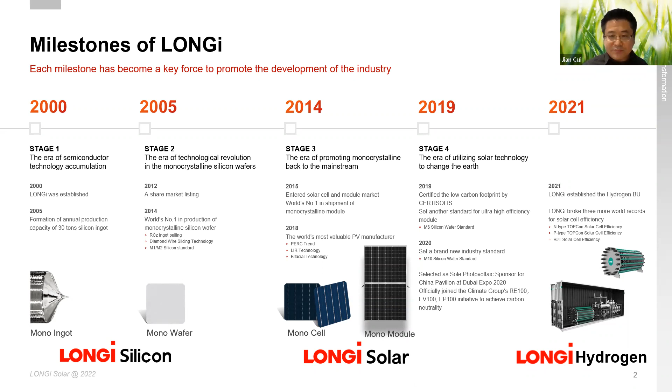Here it shows that our mono wafer manufacturing is world #1, with the industry leading standard wafer size. We achieve 100% diamond wire cutting of mono silicon wafer, and our shipment is also #1. All our factories, including ingot and wafer, shipped more than 70 gigawatts in 2021. That means all the other module manufacturers and cell manufacturers, including our competitors, buy wafer from us too.

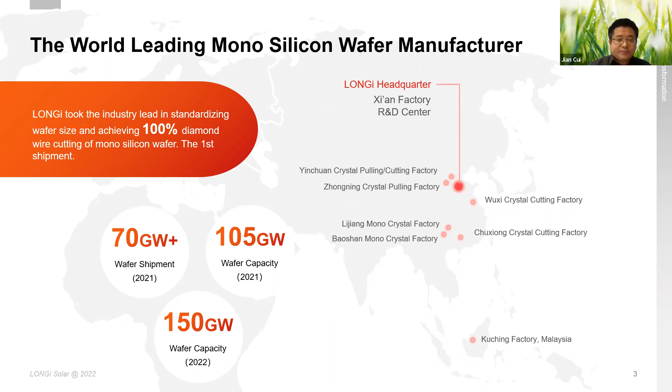This year, our wafer capacity increased from 105 gigawatts to 150 gigawatts. In 2021, we were the #1 solar technology company, shipping more than 38 gigawatts. In fact, we are always #1 for shipping mono products, but from last year we are #1 including all kinds of modules, including poly and mono. The module capacity increased from 60 gigawatts to 85 gigawatts this year.

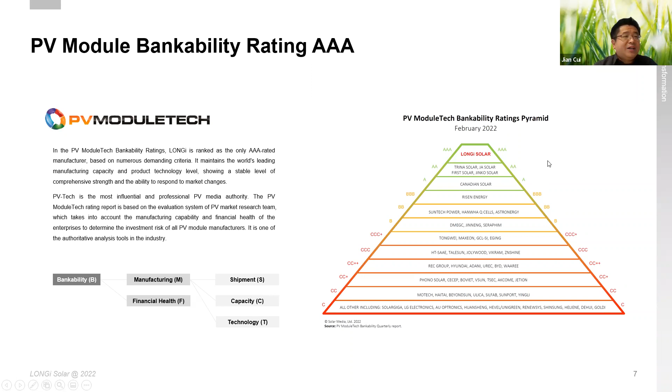As a result, by December 2021, we have accumulated 1,387 patents. We also cooperate with research institutes and industry partners to ensure our products provide the optimal solution to customers while lowering our cost.

That's why, because of this strong technology strength, it also helps us achieve strong financial performance.

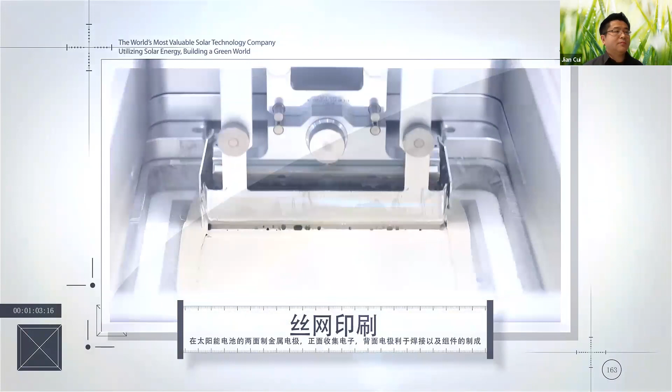Okay, the last is the PV module.

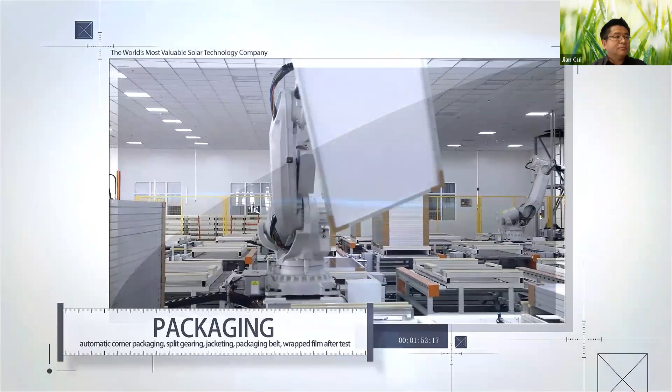As you can see, the factory is highly automated. As mentioned, LONGi diligently works with industry partners, including equipment and material suppliers, to optimize the process and increase productivity. Here it shows we're starting with the ingot production, which you saw in the first video.

From this RCZ ingot pulling technology, applied since 2013, as you can see, at the beginning it was 60 kilograms per crucible. This is one crucible.

Then with our continuous technology improvement, we continuously increased the feeding rate, and we can also do multiple pulling from one crucible. So up until today, we can do more than 1.5 tons per crucible.

The high-speed ingot pulling technology increased the speed by 80% since 2013. The production line kept advancing automation, including automatic control system, automatic loading technology, automatic edge cleaning system, etc.

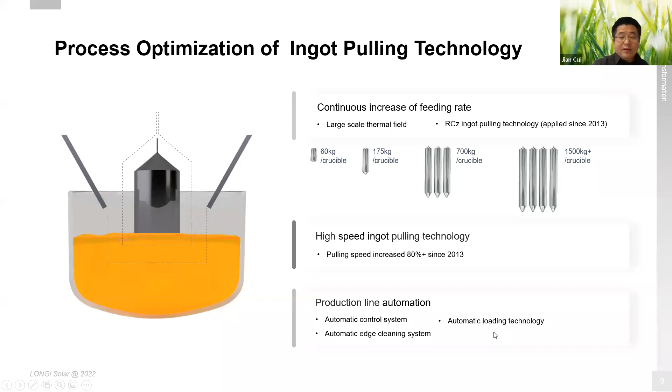The revolutionary diamond wire slicing technology was first introduced by LONGi in 2014 and achieved 100% diamond slicing in 2015. We also continuously reduced the diamond wire diameter so that one ingot can produce more wafers, and the slicing speed increased by 90%. So productivity significantly increased.

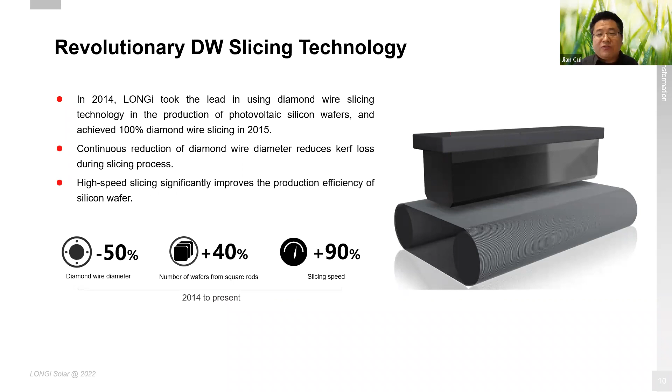This concept gives a direct idea of how it can save for the industry. Each year, due to this technology, it saved the PV industry over $4 billion. That's per year, relatively equal to the construction of 5 Beijing Olympic stadiums each year.

So that's why, because of the technology innovation, especially from the ingot and wafer part, it significantly reduced the cost by 80% between 2018 and 2019, and also the quality of the wafer significantly increased, because the quality of the wafer will strongly affect the quality of the cell, and ultimately the power performance of the module.

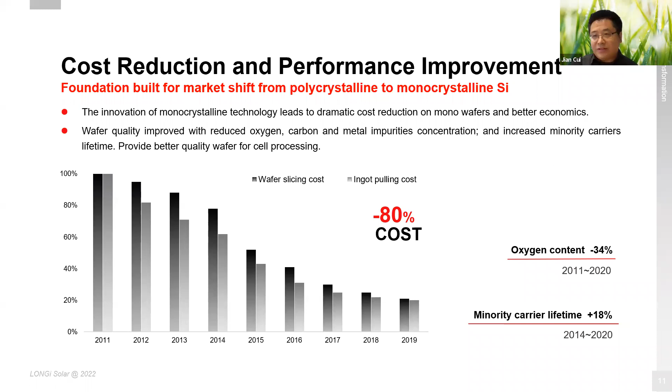Not only on the mono ingot and wafer, but LONGi has been leading technology innovation on cells and modules through the years, as you can see here.

We just introduced the ingot and wafer technology, and we also have PERC, mono PERC, from mono PERC to bifacial PERC, and half-cut to large size wafers like M6, M10 standardization. LONGi is leading the way in introducing major advanced technologies into the market.

We are one of the first companies on PERC since 2016, and our related product is Hi-MO 1. We also first introduced bifacial PERC to the market in 2017.

More customers realize the value of bifacial PERC technology and choose it, especially for their utility projects, significantly because bifacial PERC provides a higher energy yield to help customers realize their value. We call it lowering the LCOE.

So our product related to this first launch is Hi-MO 2 for the bifacial modules. With half-cut technology, the module performance is even dramatically improved, especially when there's shading.

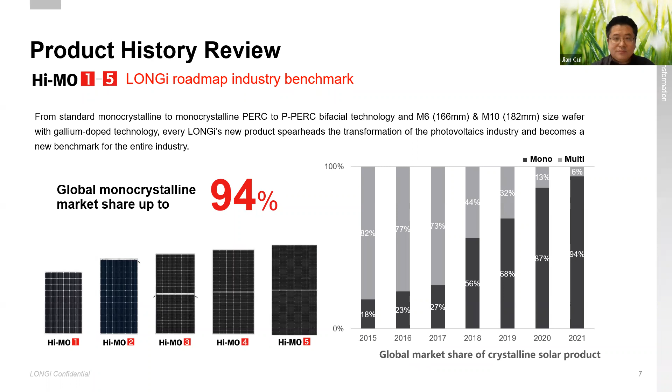Before continuing to the quality issue, I would like to briefly mention the bifacial module. What is a bifacial module, and what's its short history?

It's interesting that we saw this in the history of utility projects, and we see this happening also for DG, for everywhere. So what is bifacial? A bifacial module is glass, POE, and the cell area, then POE and glass again.

They laminate together. POE is like a glue that sticks the module together very stickily. We call it bifacial, meaning the cell has two sides that can absorb light and generate electricity.

The backside, instead of a back sheet, is glass, allowing light to reach the cells from the backside of the module. So there's a concept called bifaciality, and we use POE because it's highly reliable.

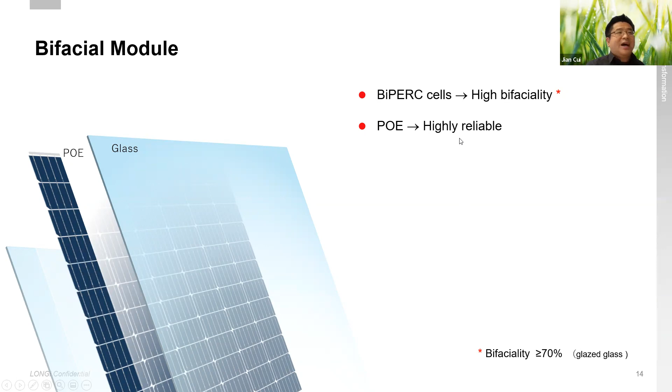The market adoption of bifacial was not an easy achievement, like many other new technologies. Customers, especially investors, did not accept bifacial right away when we introduced this bifacial module in 2017.

We had to work with various partners, including third-party test labs, downstream partners, and suppliers like trackers and inverter companies, to study how system design impacts the bifacial backside gain and how to optimize the design to maximize the backside gain. Through those exercises, we were able to optimize the module design, and partners were able to optimize the BOS coupled design and system parameters.

We are very professional on this through years of experience, and finally able to optimize the bifacial gain, which is the backside extra energy yield, so that we could establish confidence among customers and investors to finally adopt the bifacial technology, especially financing the backside energy yield. Nowadays, more than 50% of our shipment is bifacial modules.

This is widely welcomed by customers. The map here shows that, of course, before you have a project you can do PV system simulation, but more concrete evidence comes from bifacial tests through real pilot projects.

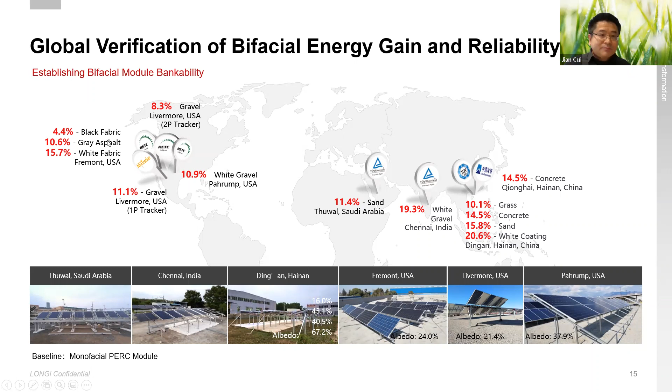Here it shows not only the pilot project but also a lot of real projects we've implemented. This big project with PV bifacial module outdoor testing was one of the tests done by the PVEL laboratory, as you can see here.

In Davis, California, they studied reliability and power generation of bifacial modules from different manufacturers, and found that products from different manufacturers are significantly different. In fact, this shows that our module has the best performance for the bifacial energy gain.

Here just grass reflectivity means the ground situation is grass, and white reflectivity means the ground is white. Usually when the ground is white, there is more reflection, so the bifacial gain is higher.

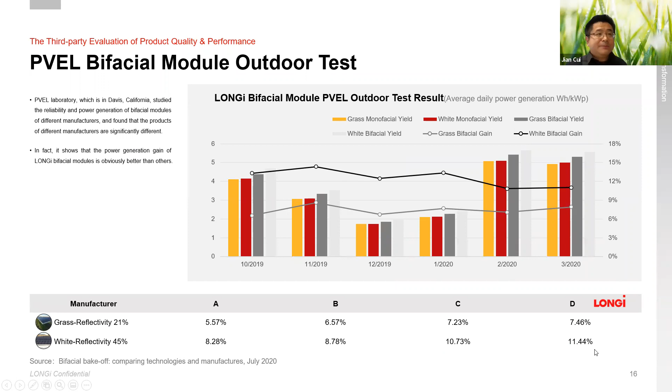LONGi started mass production of PERC cells and modules back in 2016, and we led the industry-wide adoption of mono PERC.

Our PERC world record efficiency is 24.06%. The quality, performance, and reliability of our mono PERC modules are also proved by famous third-party organizations like TÜV Rheinland, PVEL, and RETC, and also the power generation test by PV Magazine. Our modules are always in the top 5, and especially one is always ranked first.

Besides the PERC technology world record, since 2021 we've kept breaking world records on TOPCon, N-type TOPCon, P-type TOPCon, indium-free heterojunction, normal heterojunction solar efficiency, and P-type heterojunction. Just a few days ago we also set a new world record on heterojunction solar cell efficiency, which is 26.50%. The highest cell efficiency of other technologies mentioned today is 26.60%.

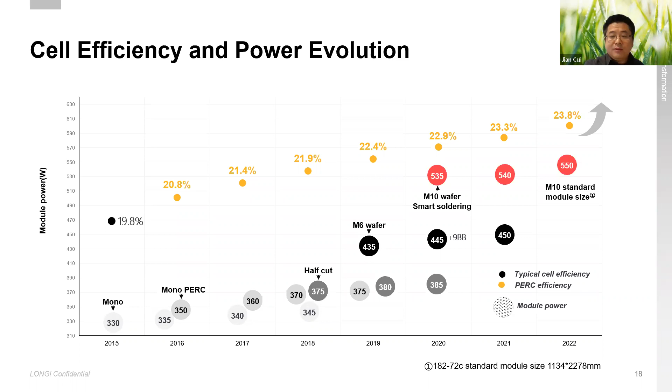That doesn't mean we don't consider other cell technologies. As you can see, we already have efficiency world records on other technologies. We continue to develop and evaluate advanced technologies like passivated contact - you can understand this as heterojunction, TOPCon and heterojunction, back contact, and tandem. For sure, cell efficiency will increase with those technologies, but you should consider the challenges, such as cost, and especially mass production and high volume manufacturing feasibility.

So as LONGi, our conclusion is that right now PERC is still the main technology, and we still need to dig deeper for its potential - it will remain the main technology for the next 2 or 3 years. But as I mentioned, we will introduce the right technology at the right time. We have all the cell technologies ready in our yard, so we will introduce the right technology into production and into the market at the right time.

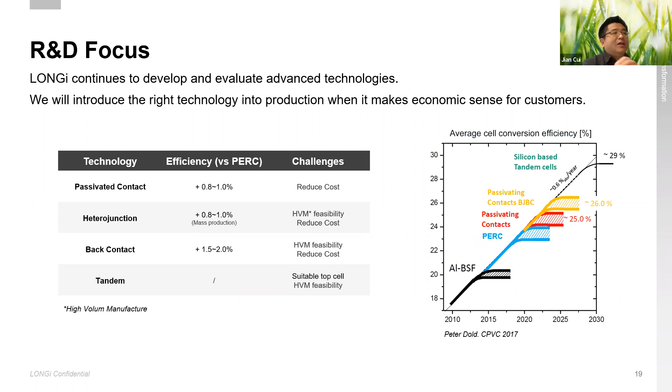Back 5 or 6 years before, when the module industry was starting to boom, at the beginning it was always government support, like a feed-in tariff. At that time, the most emphasis was on module design, and relatively less emphasis on verification. But nowadays it's always about bankability — you need to get money from the bank to support your projects. So more and more, module reliability tests, manufacturing quality control, and field performance become more and more important.

We have all this quality control, certified by our quality management. So we launched LONGi's lifecycle quality, which means we guarantee our product quality and performance from start to finish — from module design and verification of all the reliability, to quality control and performance. I will explain in more detail in the next slides.

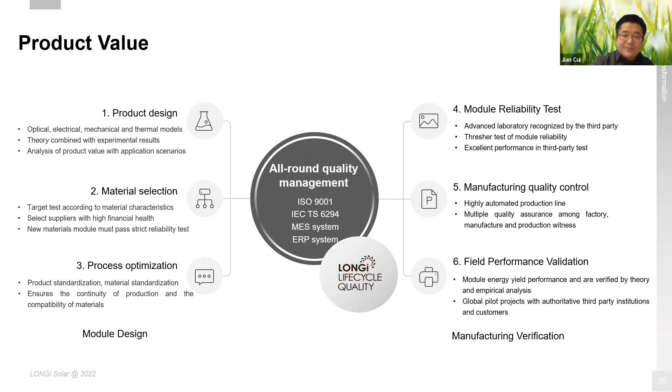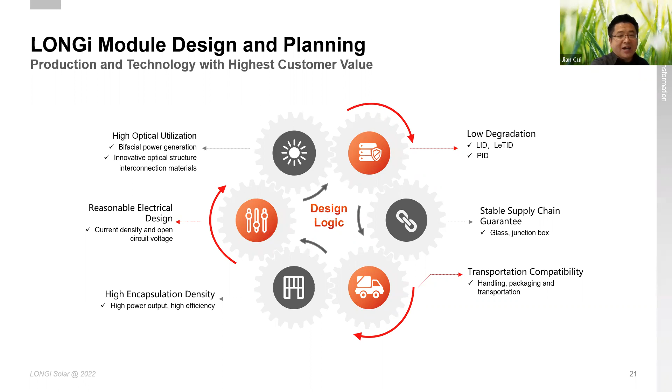First, you can see the way that we design our module: high optical utilization, bifacial power generation, innovative optical structures, interconnection materials, reasonable electrical design, current density, open circuit voltage, and high encapsulation density, which leads to high power output and high efficiency, like smart soldering — I will mention this technology later. Lower degradation on LID, LETID, PID. Stable supply chain guarantee, like glass, junction box, transportation compatibility, handling, packaging, and transportation. These are the factors we consider in order to have the optimal design on our modules.

Nowadays a lot of people are mentioning bigger size, bigger wafers. So let's get back to some background of this issue. The idea of developing 210 millimeter wafer size, in fact, comes from the semiconductor industry.

For the semiconductor industry, chip production — semiconductor wafer production — is the most expensive part of that industry. That's why they use bigger sizes to get more chips from a bigger wafer. But for the semiconductor industry, this does not affect the downstream, like packaging or handling. It's totally different from the PV industry.

As you can see, in the PV industry, the upper part — producing the wafers — is only 7% of the total cost, so it's relatively less. But we need to consider the downstream, like handling the modules, supply chain stability, and the steadiness and reliability of the modules, and all the things we need to consider. So I want to emphasize that these are two different industries, and the 210 is taking an idea from the semiconductor industry.

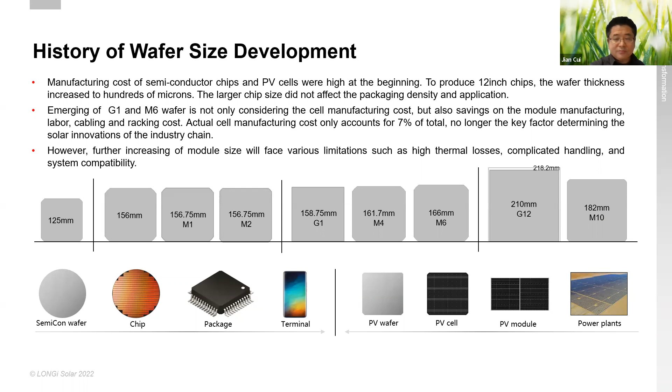For the module design, we provide the optimal design based on comprehensive boundary conditions analysis. Why do we choose 182? Indeed, this is about the question of whether bigger is better for PV modules or wafer size. The answer, for sure, is negative.

Why? Because we need to consider material properties like glass, frame, and cell. If you have a bigger size, there's more risk of failure rate increasing. Under situations like hurricane, blizzard, hail, electrical stress, transportation and handling, the bigger size will also cost you more problems — same with tile, landscape, and portrait installation. So by considering this, we arrived at the optimal solution: the optimal size is the 182 wafer size.

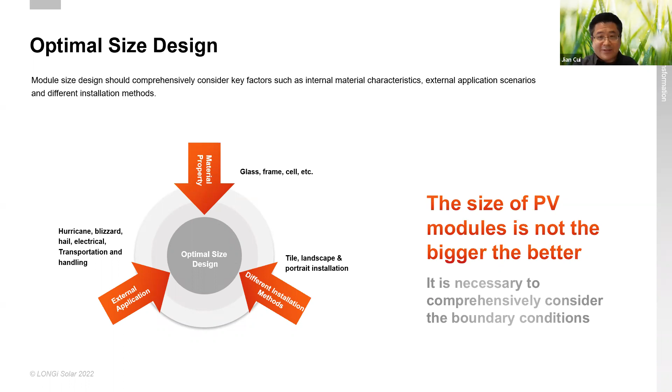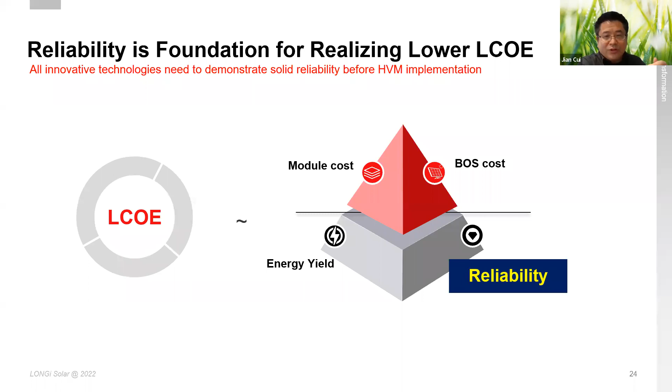Again, when we talk about LCOE, levelized cost of electricity or energy, it is all the money you invest for the project divided by all the energy you get from this project over the whole life of the PV module. Reliability is the most important thing on this issue, because if you lose reliability and your module breaks, anything happens, then there's no point mentioning the benefits you got. So let me give a concrete example.

We compare the 210, 60 or 66 cell module, with our 182, 72 cell module. You can see the width increased from 1.13 meter to 1.3 meter. Then the deformation, under the same mechanical load, increases 40 to 60%. And here it shows the microcrack — with such an increase, inevitably there are more microcracks. So we cannot compromise reliability for the size of the module.

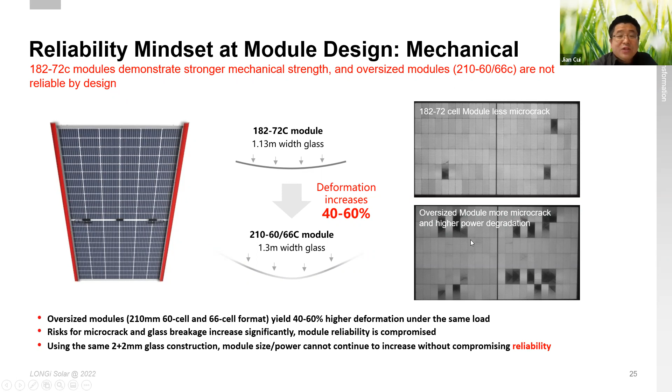The other thing I want to emphasize is that if we talk about module efficiency by wafer size, it's basically very similar, and if you consider the average, it's even a little bit less. This is the cell efficiency over wafer size - as you keep increasing the wafer size, the cell efficiency will even go down. So that's why we need to choose the optimal one, which is the M10 wafer size.

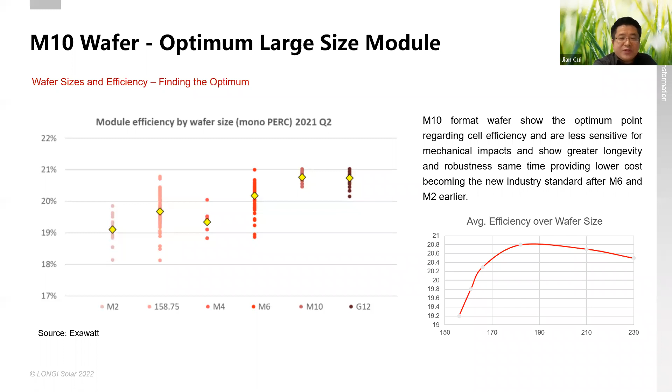Module reliability - on this issue, I mentioned the smart soldering. We have a patent on this. It uses a triangle ribbon on the front side, which can absorb more light and reflect more light onto the cells, and on the back side we use a flat section.

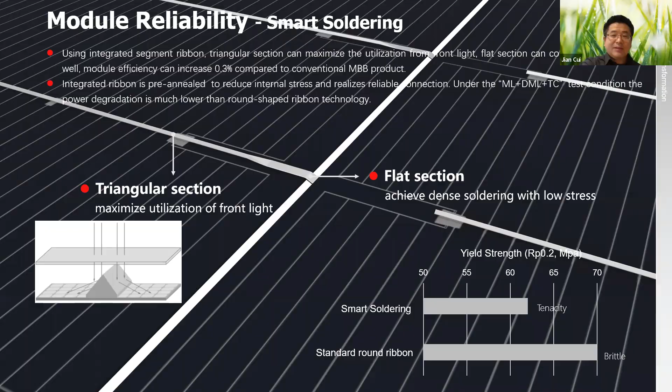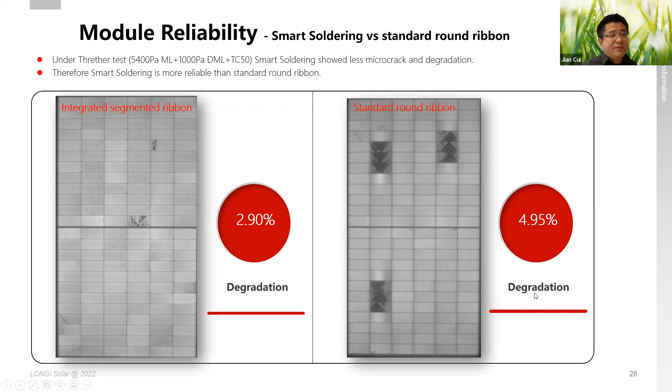Less flexibility - this comparison with the Thresher test is a very critical test. It's 5,400 Pascal static mechanical load plus 1,000 Pascal dynamic mechanical load plus 50 thermal cycles, and you can see the results: the degradation using smart soldering is only 2.9%, while with the traditional standard round ribbon, degradation is nearly 5%.

From 2019 to 2021, we achieved high achiever status, and this year there will be one more program. We achieved the highest in all three categories: reliability - damp heat, thermal cycle, dynamic mechanical load, PID test; performance - module efficiency, PTC to STC; and Pan File, LID, LETID stress. This is on performance, and quality Thresher testing - we achieved top performance in all, which is why we are a high achiever.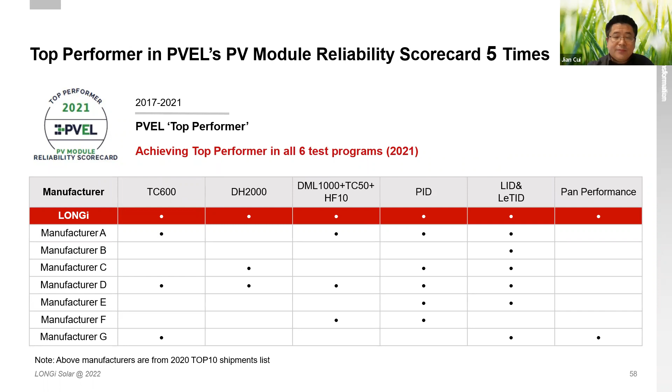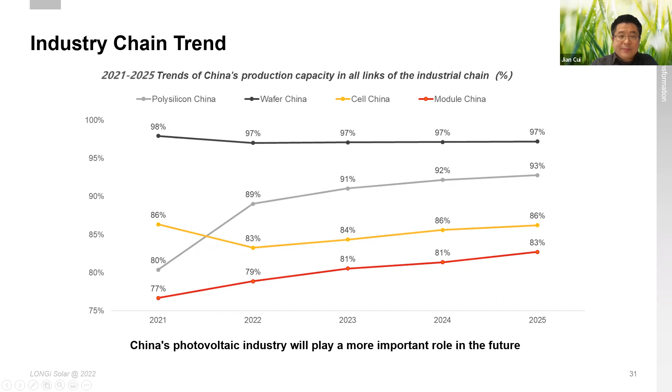This slightly decreases nowadays because there's a lot of new capacity - new cell and wafer capacity, new lines coming up. So there will be a slight decrease because the old lines will go offline.

Here you can see the shipment capacity from 2011 to 2021 for the main module manufacturers. We started from 2015, but we have grown aggressively - until last year we reached 38.5 gigawatts. This shows capacity in 2021 with the full color here, and then 2022 - we are also number one in capacity.

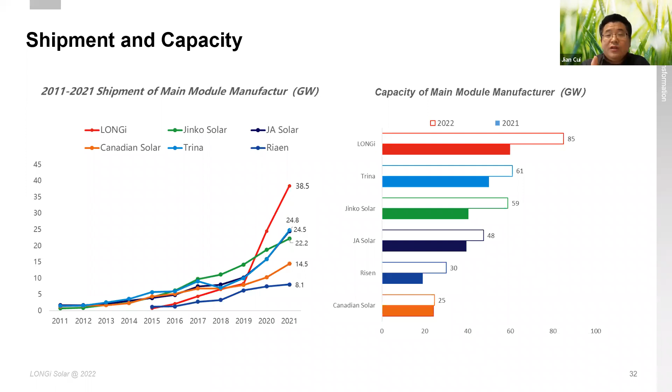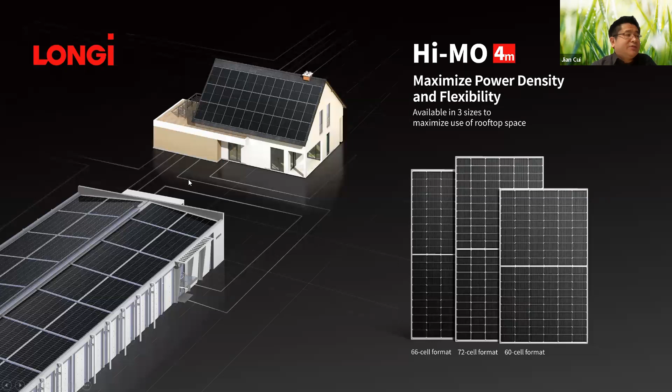For the monofacial Hi-MO 4m, as mentioned, the 60, 72, and 66 can cover all the possibilities on the rooftop. It can be used for residential, C&I, and also 72 can be used on utility, especially if you want to build something in a ground situation that's not flat, like a small mountain or somewhere. This is very fit for that scenario. This is based on M6, which is 166 millimeter wafer size and gallium doped.

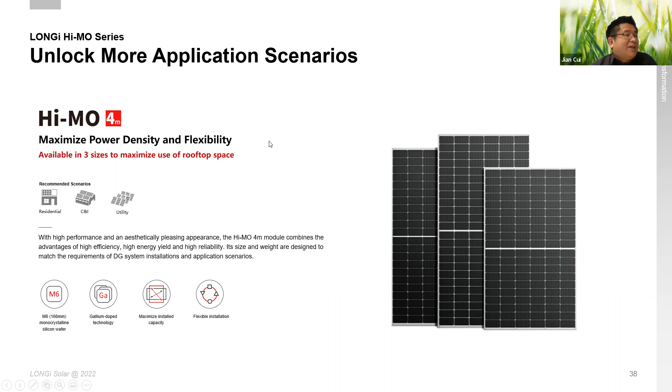It can maximize your installation capacity, flexible for installation. Hi-MO 5 products, we also have this family for a wide range of applications with 54 cells, black and white, and 66 cells, and 72 cells. The power somehow is comparable with HIMO4 - this one can be a substitute for 72 HIMO4 modules. This one can also substitute the 66. Because by the end of this year, all our HIMO4 products will be phased out, meaning there will be no production for HIMO4 modules. So 72s for higher, especially for utility.

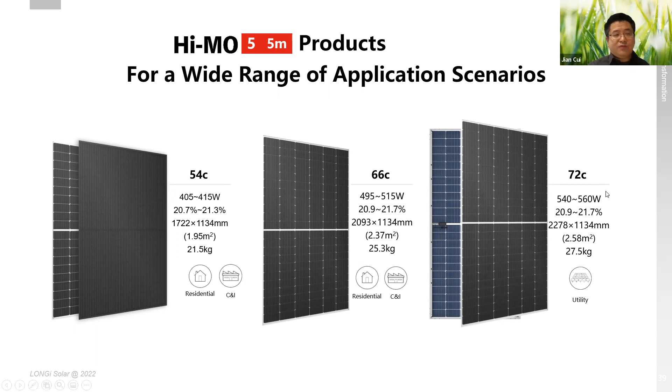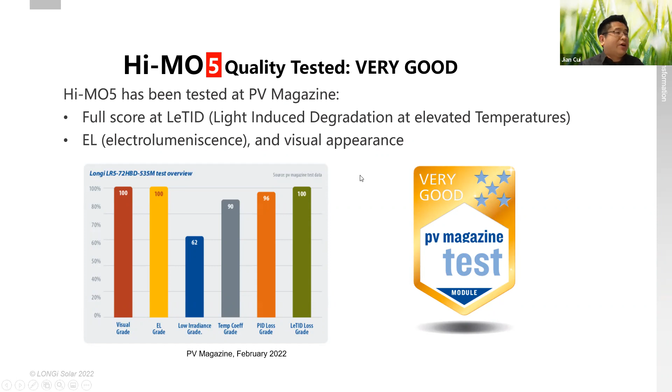We have very good quality test results from PV Magazine, especially the LeTID, light-induced degradation at elevated temperatures. This mainly measures the quality of the wafer and the cell. LETID means that when the temperature goes up, the cell's performance degrades - and how much should that be? Usually, the standard should be less than 0.5%. We have a full score on that, which means with high quality cells, for sure you've got a high quality module. And also for EL and visual appearance, we scored 100 points.

Our 72 bifacial cell HIMO5 module won the Intersolar Award. It's worth mentioning that this award is not only a competition among PV module manufacturers, it's a competition among the whole PV industry, including inverters, etc. So with the big brother winning the Intersolar Award, we now have a product, HIMO5 monofacial. A residential standard that can be applied based on M10 wafer size, gallium doped, smart soldering - this also won the Intersolar Award.

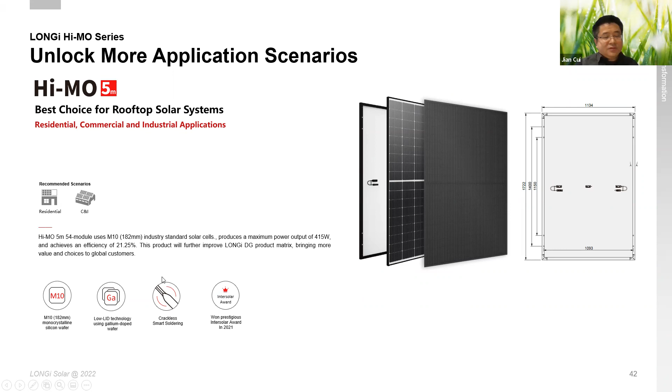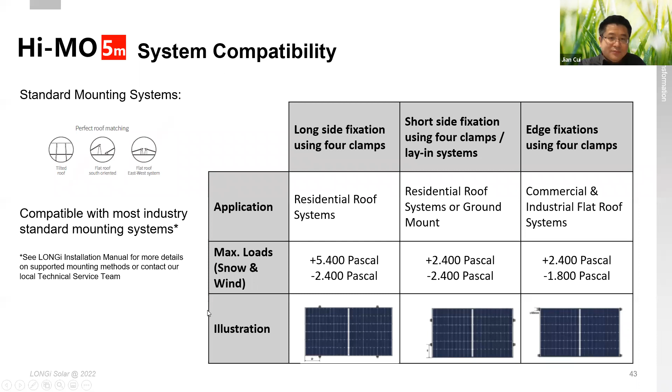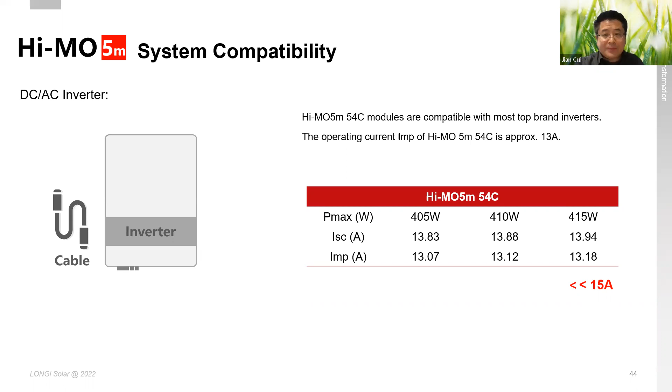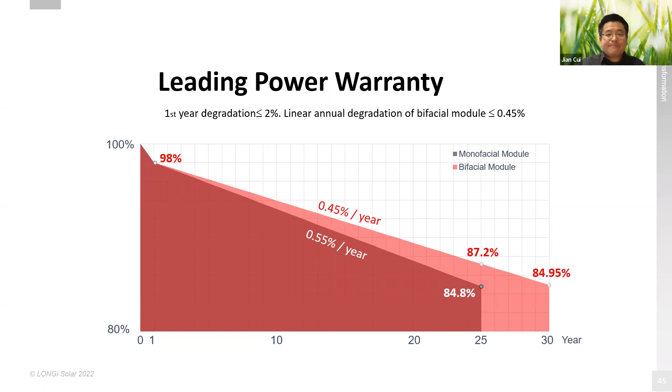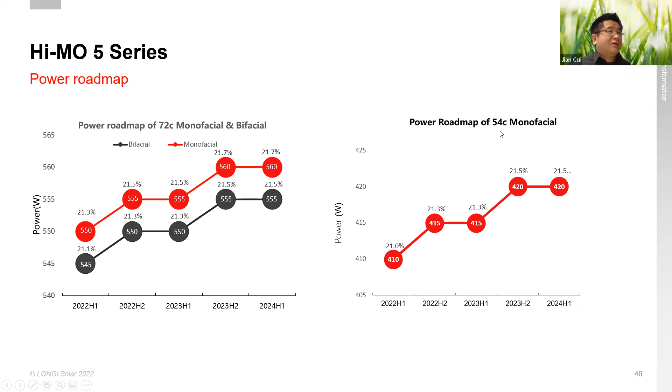In this year's Intersolar, LONGi also launched two new product categories for BIPV solutions. One is LONGi Roof, one is LONGi Bright. I will not give a more detailed introduction here because it's just launched. We still need time for it to evolve into the market, so we can have other webinars or technical exchanges on this topic later.

The idea for these two products is to empower every inch of the buildings to generate electricity. We have a lot of projects already implemented in China.

Last but not least, I would like to mention our sustainability commitment to the environment, for the LONGi sustainable future. We have concretely set up milestones for each step. For example, by 2028, our factories will use green energy to produce the product, whether wafer, ingot, cell, or modules, etc. I will show you some more concrete achievements from last year in the next slide.

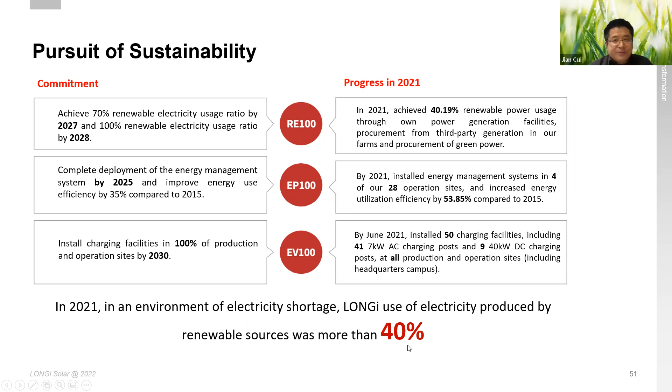I think that's all for today's presentation. If you have any questions, I'm here at your disposal.

Thank you very much. It has been quite quiet in the chat, but it was extremely useful information, I think. And I think you really highlighted the importance of not only choosing the right module, but also the right module manufacturer, because the choice you make, you will stick with for at least 30 years. So it's an important choice, and the module manufacturer will be a very important partner not only to us as a wholesaler, but also to the installer and the end customer. I think you highlighted that very, very nicely.